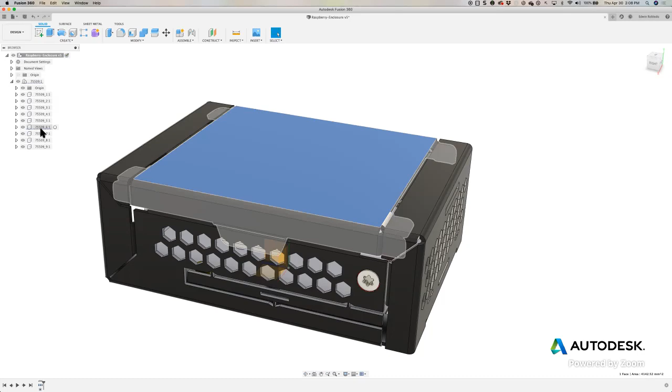So how would you do that? First, I'm going to hide a couple of faces here so I can get exposure to the bottom. If I click the faces, it highlights which one it is, so I can turn that one off. I'll turn this one off, and on the rear one we have over here, I'll turn this one off as well. I'm not deleting it, just turning it off, so I can get exposure to the center of it.

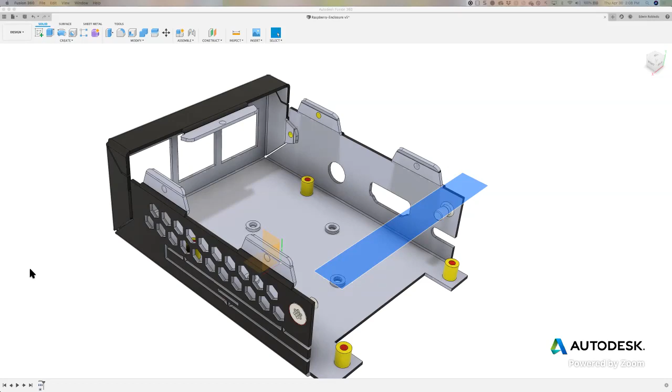Jorge, are you there? Yep, I'm here, Ed. Oh okay, I heard some breathing, I was like, what's going on here? Yeah, I thought it was the echo or something from YouTube. Hey, hi Jorge, nice to have you here, man, appreciate it. How are you? How's it going on your end? Doing pretty good, sorry I couldn't get in earlier, started getting a leak in the house over here. Oh, so you're seeing the effects of the storm that just came through, huh? Yes, yes I am. Wow, incredible.

So what I'm going to do is capture this enclosure here. I'm not going to draw it, I'm actually just going to capture it and bring this into Eagle, so I can lay out my circuit board based on this enclosure that I'm about to capture.

So the first thing I need to do is the circuit board is going to be sitting on these standoffs, sitting up on these standoffs right here. For it to be able to do it, since it's not working on one of the planes - these origins you see here are the natural planes of Fusion 360 - I don't want to do it on any of these planes. I actually want to have it on top of the standoff.

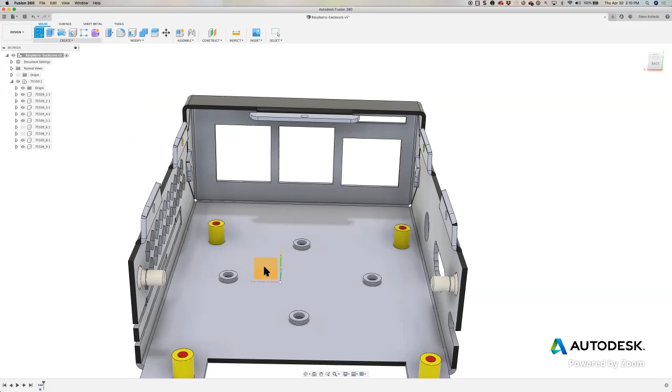So to start this process, we're going to click on the sketch and create a sketch. The first thing it asks when you create a sketch is which plane you want to use. You'll notice the default planes highlight, but I don't want to use any of those. I actually want to put it on this plane right here, right on top of the standoff - that's where I want to eventually put my sketch for my circuit board.

Now that I've highlighted what plane I want to use, on top of the standoff, I need to project the bottom of this enclosure, because this is more or less the same size that my circuit board needs to be. I'll make some small modifications to it as we go along.

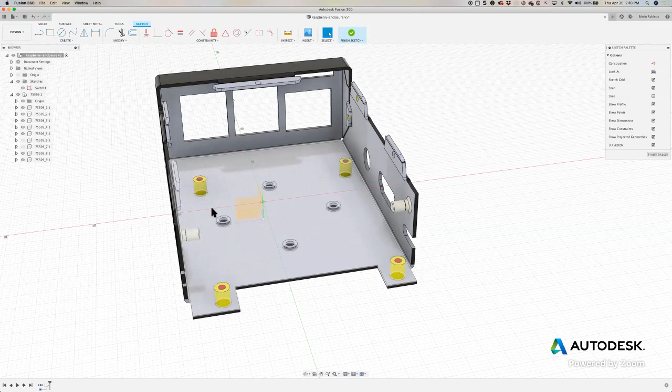Now, to capture this bottom of the enclosure, I'm going to use one of the features. I'm still in sketch mode, and as you can see, the menus change and I get the sketch palette with all these options. Under 'Create' it says 'Project', and I'm going to select the project option. Whatever I project will be projected onto that plane I already defined, on top of the standoff. So as I hover above the different profiles on this Pi enclosure, you can see it's not hitting the bottom.

It's actually on that plane, identified by those red lines. So I'm going to click on this enclosure right here on the bottom. I'll select that, and there's some information here that I do not need, that got projected. Let's take a look here.

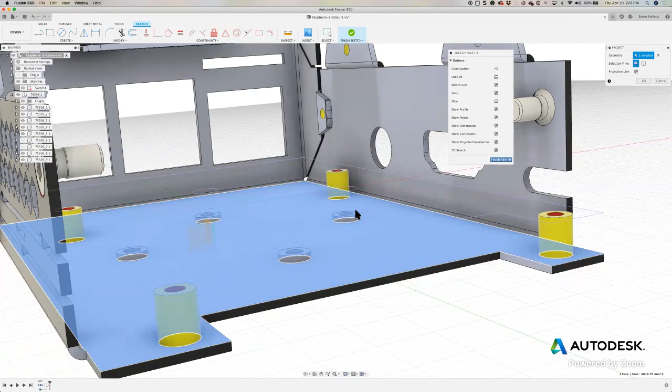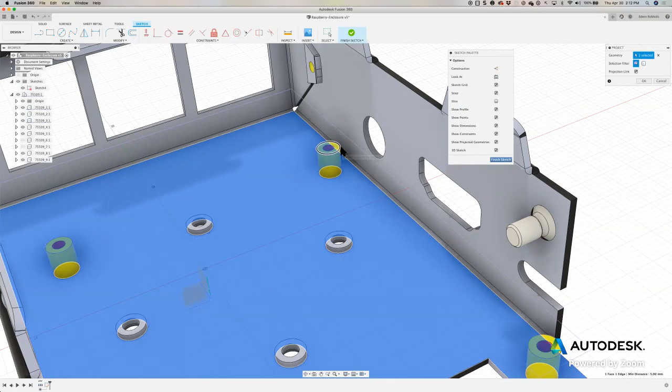Now for my standoffs, I only need the hole for the screw to be projected, not the outline. So I'm going to select those and delete them. I'll delete that one as well. I left click it and hit delete. I'll delete this one as well, get rid of that one. I'm just highlighting them and hitting delete.

As you can see, okay, so there we go. I think I missed that one, and they're gone now.

Now what I want to do is actually project the drill holes for each one, so I'm going to click on Create and project it again.

Remember, there's many ways of doing this. I'm just using the most elementary way because as an electrical engineer, my mechanical aspects are not very strong, so I'm trying to show you the most elemental approach. There are other ways of doing this which are probably more efficient, but this way actually works, and it works really well. I've been able to do it a couple times, and it works really well.

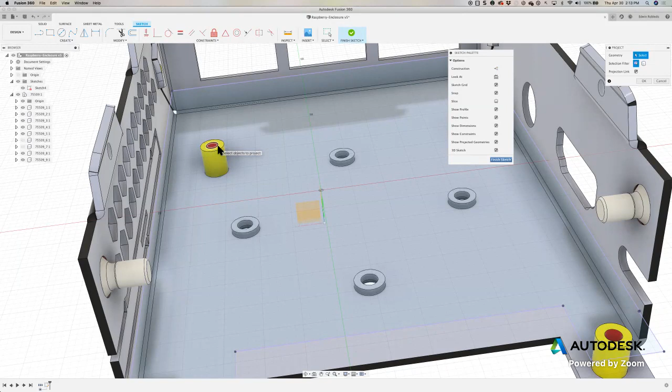So now what I'm doing is projecting those holes right there, as you can see, projecting only the holes now. Okay, so that gives me those holes that I want.

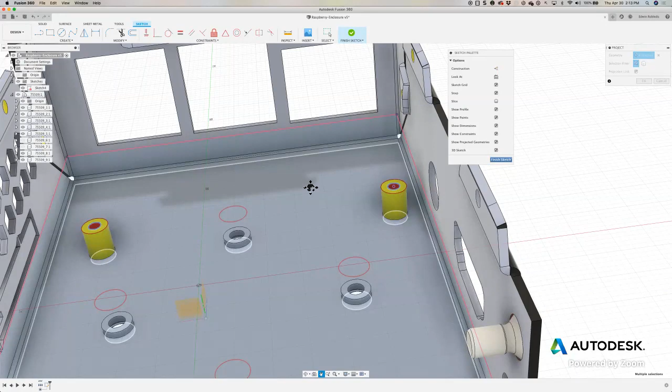Now, as you can see, the red line is going all the way. I'm going to click OK because I no longer need to continue to project. As soon as I highlighted project, this project option came up. I already projected everything I needed to project. I'll click OK, but I'm still in sketch mode.

Now the next thing I want to do is address that the circuit board is actually going to go all the way to the edge of the board. I don't need it to go all the way to the edge. I need to leave some space so that it actually fits into this enclosure outline.

So right here we have this option that says offset. I'll select offset, and I'll click on one of the sides that I already have. Let me zoom out a little bit so you can see the effect that it does. I'll click here, and now I get an offset.

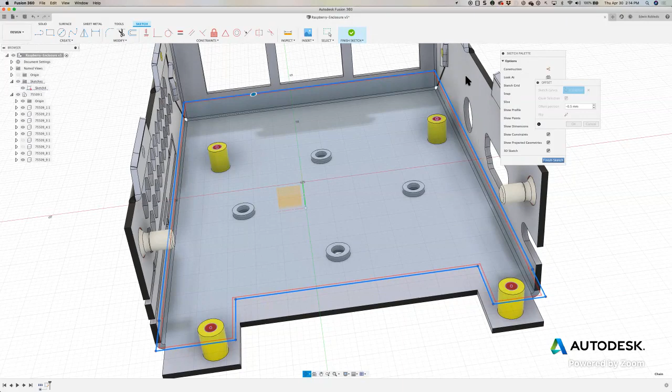In this case, when I did the offset, it went into the positive direction, so it expanded what I've drawn 1 millimeter all over the entire profile. I actually want to bring it in negative 0.5 millimeters because I just need it to be a bit smaller than the board outline. You see these red lines here, showing the profile that's going to be used if I give it a value of 0.5 millimeters. That's correct, and here's my offset menu, and you see the offset right there.

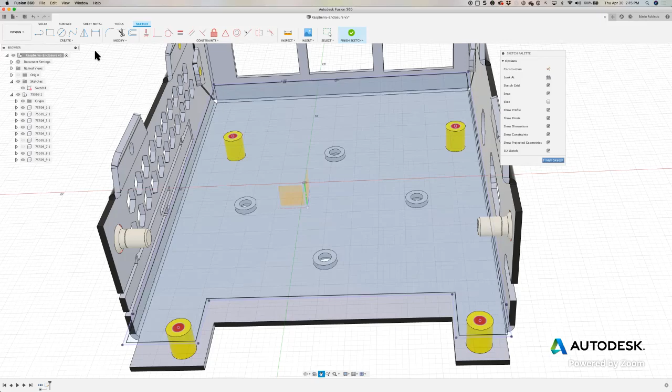The values are the same. I'll click OK because that's the value I want to use. Now that I've created the profile with the holes that I want, I'm going to select Finish Sketch. I'm done here. So now I've defined a profile.

By default, the sketch is not deleted, it's just hidden. So I'll go to the browser and enable the sketch option there, so I can actually see the profile for the sketch.

Now here are the steps that I had. I did this demo yesterday, and some people had trouble, I guess maybe I was going too fast. So let me make sure I go very detailed, that way you see exactly what's going to happen now, okay?

I'm going to click on Create, and select where it says Create 3D PCB. I'm going to select 3D PCB.

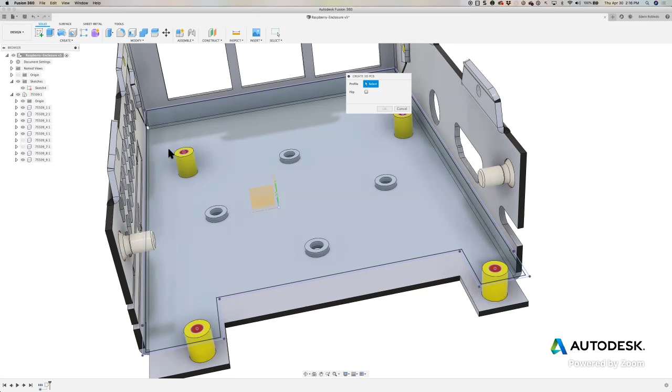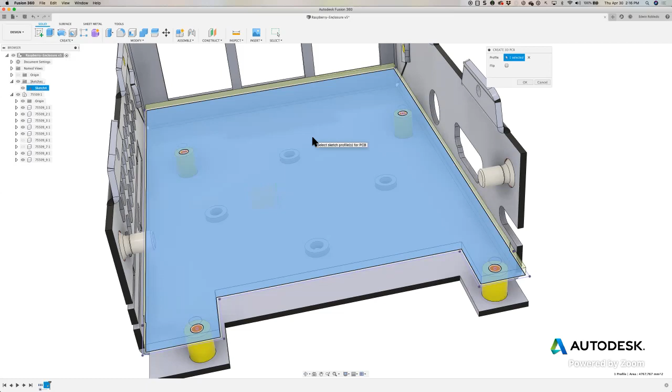Now I'll go ahead and select the profile I want. As you can see, I get the dialog box. I could flip it, and I could select more than one profile. This was a complex enclosure with some geometry that needed me to select and define different profiles. In this case, I only have one profile, which is this one, for sake of example. The profile that got generated was the one that we offset.

Let's see how that looks different. Let's zoom in here. As you can see, we have the original projection that we did, right here. And this is the offset projection, the one that we offset.

So we took this projection and we offset it, and I want to go with this one. That gives me a little bit of space, so when I insert the circuit board it doesn't put it too far away. So when I put in my micro USBs and all my connectors, my audio connectors, and my RJ45s, it's not that bad. It's close enough that when I solder them, they'll be soldered close enough that I could plug into it.

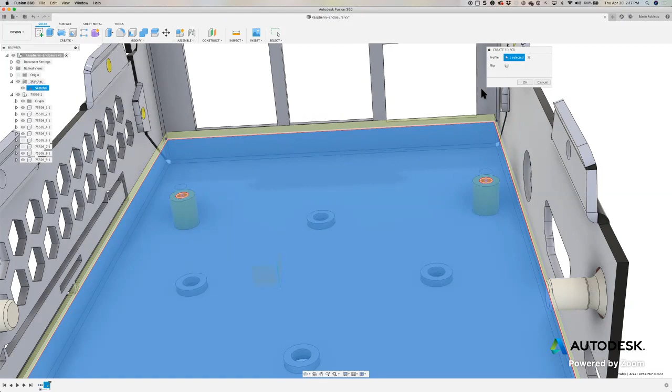And you'll see that the holes here get projected. I got my four holes from my standoffs. So I'm going to go ahead and click OK.

When I click OK, it's going to automatically open up a brand new tab and put me in the 3D PCB editor. That's what you're going to see. If you notice, I only have one tab open right now, the Raspberry Pi enclosure.

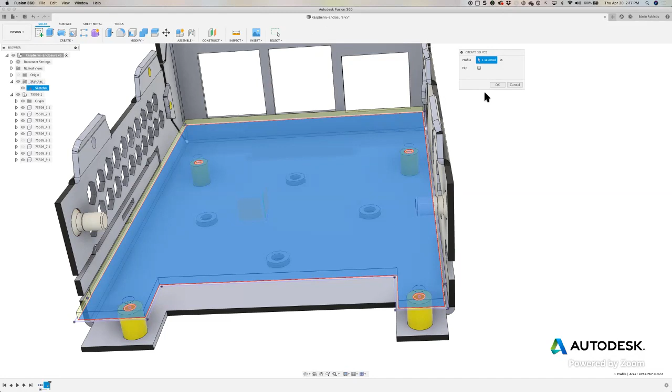Now as soon as I click OK, look what happens. It brought this into the 3D PCB editor. You'll notice it opened up a second tab. We had one tab, now we have a second tab with the 3D PCB editor only. In a few minutes you'll be noticing why it does this, and it's actually pretty neat. The 3D PCB editor is quite powerful. There's a lot of things we could do here, but not right now.

It looks like the outline of my board. As you can see, I was able to project all the holes and details from the projection. It's pretty neat that it even captured that little corner right there from the enclosure—it actually adopted those corners. This is something that could be done in Eagle directly, but if I don't have to do it in Eagle and I can get it straight from the enclosure, there's no more guesswork whether it's going to fit in here or not.

The first thing you can see is it has the name on the title and it's dirty, meaning it just has an asterisk, which means it needs to be saved. That's all that means, as you can see right here. So let's go ahead and save this so far. I'll click on save and call it Pi 3D PCB.

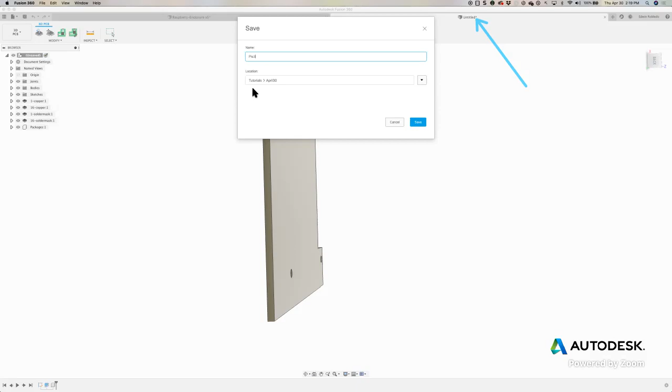Okay, very well. Now I want to capture this and bring it into Eagle. Let's see how we do that. So let's go back to Eagle.

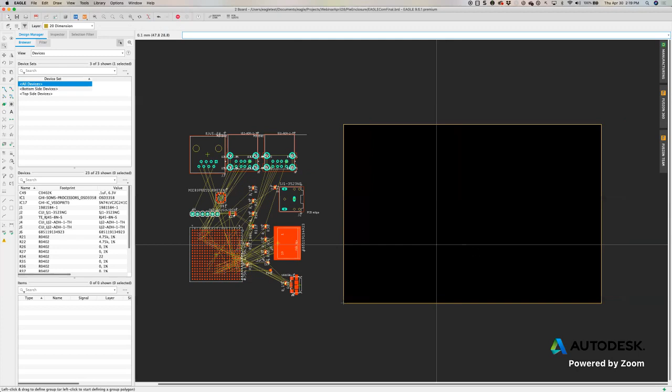Now that we're in Eagle, as you know, when you're working from your circuit board—this is the little circuit board I laid out for this example today—and you push over to board, you notice all the components show up on the left-hand side and you get this default board outline. Now what I want to do is take that outline I did in Fusion 360 and bring it in here. So I'll go ahead and click on Fusion 360 on the flyout menu that we have here.

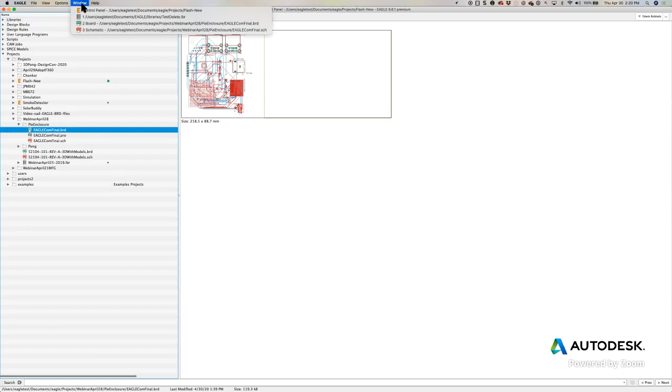Now this is going to take a look. First of all, the condition for this to work is that you need to be online. Let me go to the control panel so you could understand that—that's actually why I was at the control panel. You need to be online, so you're going to be seeing the symbol right there. If you're not online, this is not going to work because it needs to be able to access Fusion, and the only way it does that is through the internet. So let me go back to the board and click on the flyout menu that says Fusion 360.

I have the option to either create a brand new Fusion 360 design, which pushes my circuit board straight to Fusion 360, or link to an existing design. In that first scenario, the board layout drives the enclosure since I'm not taking an existing enclosure into consideration. I'm just pushing the circuit board to Fusion 360, and the mechanical engineer will create an enclosure surrounding it.

But I'll use the most common example, which is capturing from an existing enclosure. So I'll click on link to an existing Fusion 360 design.

Now it's going to take a look at all the different hubs that I'm a member of. I'm going to use the one I've been using, my personal hub, Edwin Robledo. That's the hub I've been doing this example with, and this data set is there. It's loading here as it browses all the projects I have open.

So I need to go to my project folder, Tutorial, as you can see here. Underneath Tutorial, I have a subfolder called April 30th, and there's my 3D file.

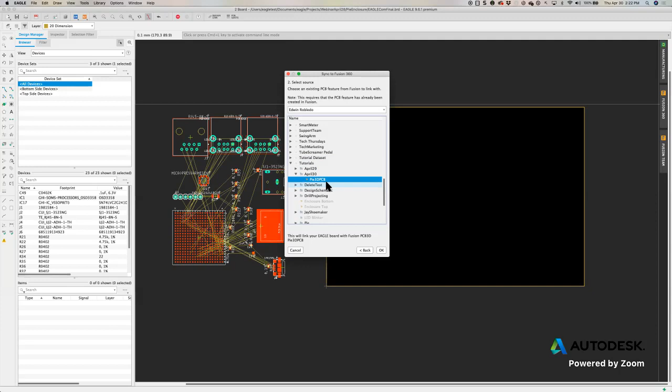This is the name I gave the project, Pi 3D PCB, and you'll see that it matches in Eagle as Pi 3D PCB. Now let's go ahead and click OK. This should take maybe a minute, hopefully less.

Now I have the option to push to Fusion or pull from Fusion. When in doubt, always pull from Fusion—I learned that from Jorge. So when in doubt, always pull from Fusion. Is that right? I think I got that right, Jorge?

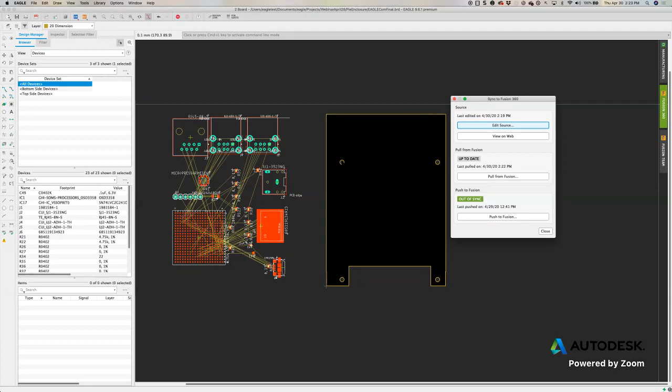As you can see, my outline automatically came in. I did not have to do any file conversions at all—it just came in automatically. So I'm going to click on close. I'm not going to push back to Fusion because I want to move all my parts into here. Now I have to take into consideration these holes, which are the mounting holes. Let me go ahead and click on close.

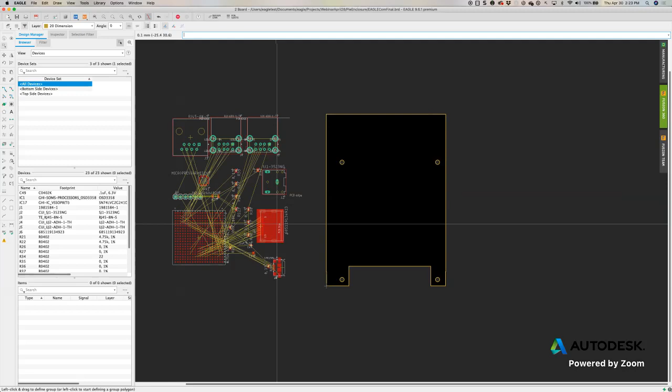I'm going to capture this by defining a group. In Eagle, the group command is always on by default. I could either select single components by clicking and holding at the origin of the component—let me find the origin of this part here—or I could just click on any blank area and click and drag to select all the assets I want.

So now I'll just click and hold on one of the origins of one of the components and drag it into here. I wanted to show you this because I don't have to do any clicks or select any icons—it's just already there, so I'll take a guess here and just put it here.

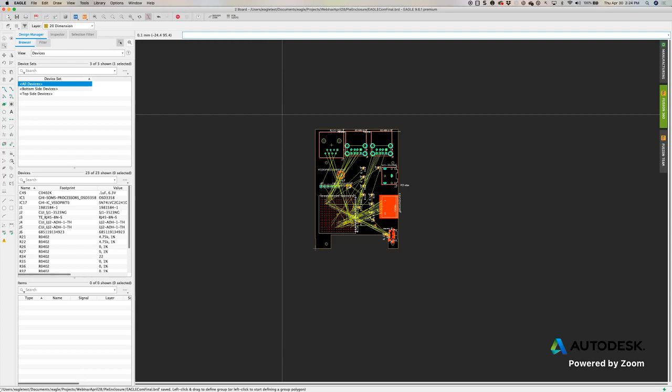Okay, I'll save what I've accomplished so far. I'll click OK. And it's always good practice that before you actually start any routing, it's a really good idea to go ahead and push it to Fusion 360, to make sure that this is going to fit, that we're okay.

Notice that my origin is actually the bottom left corner here, that's my 0,0. The reason why we usually try to capture this as my origin in Fusion is that way when I generate my fabrication files, everything will be in a positive coordinate. So when you submit your Gerber files and your drill files, it's undesirable to have negative values.

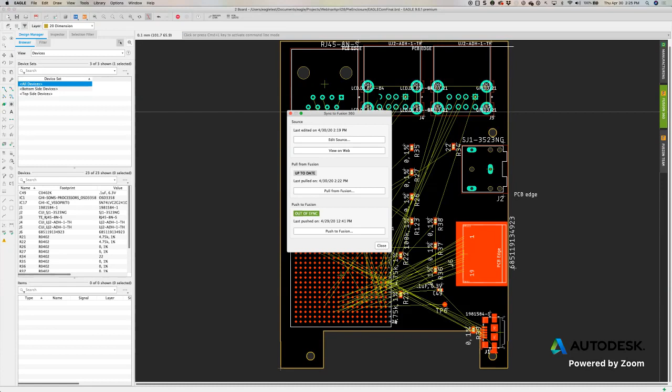Now that I've accomplished this, let's go ahead and save what we've done so far, and push it over to Fusion 360 to see what happens. So I'll click here to push to Fusion 360. Remember, my source is still the 3D PCB that I had. If I wanted to push it to somewhere else I could click cancel link, but I actually want to continue working with that other one I had, so I'm going to go ahead and push to Fusion 360.

The little green check marks you see next to the name of each component just let me know that those actually have 3D models mapped. The ones that do not have a check mark just mean there is no 3D model mapped. So let's go ahead and click on push.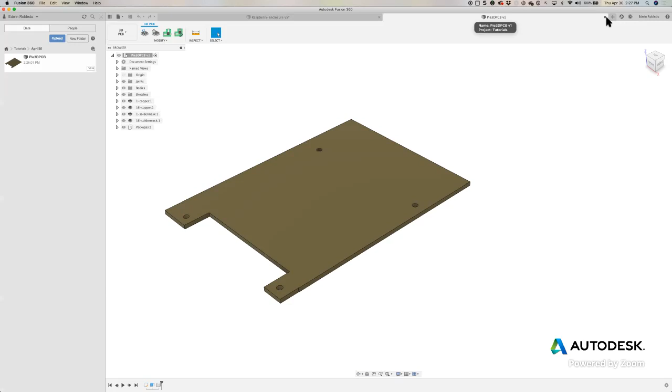So the first thing you need to do is click on refresh, and you actually need to close this tab, and then I'll double click that project.

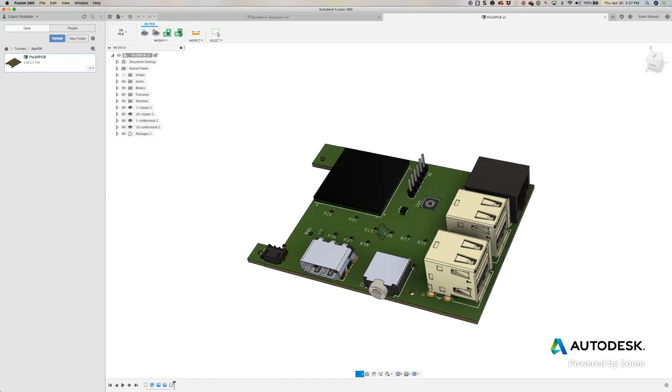Now, when it loads again, you'll notice that it loads a 3D PCB with all of the components populated on the circuit board, as you can see here. So here's everything that we need.

I almost have everything populated here. Not sure why this component did not come up, but pretty sure we had that there.

As you can see on the 3D PCB, if I wanted to move something here, I could actually move this part. I noticed that this resistor is kind of hanging in the air here, so let me just go ahead and move that. I'll click here where it says move, modify, over in this tab here, it says modify. I could actually select a component.

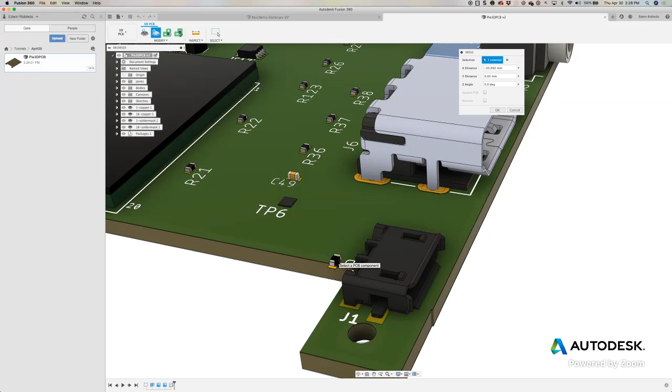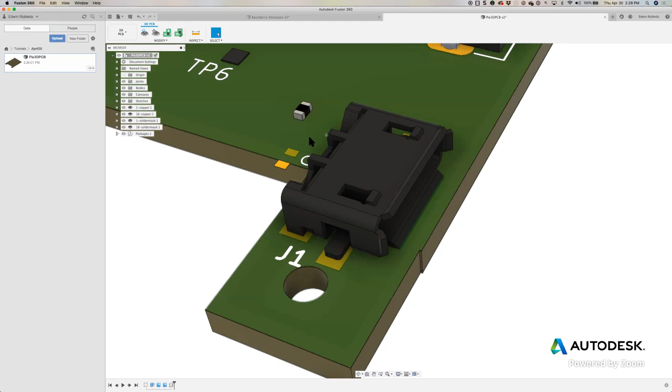Click cancel, let's try this one more time. There we go, now it lets me select the part. Put this guy over here and click OK.

Now that I've moved that component because it was actually outside of the board, I'm going to go ahead and save what I've done. It's a really good time, every time you save, to put some information here. So you're going to put in 'moved R6 into board.' I'll go ahead and click OK, save.

Now let's go ahead and return to Fusion 360, I'm sorry, to Eagle, and let's see what's going on in Eagle over here. So in Eagle, after a while, after several minutes of working here, you'll see this actually turn kind of a red color. But for sake of time, I'm just going to go ahead and kind of force it.

So I'll click on Fusion 360, and when it refreshes it lets me know, look, I'm out of sync. Usually once it catches up you'll see it like this. Once you're working with Eagle, if the mechanical engineer in the 3D PCB made a modification, eventually you'll see it come up in red like this. You have to make sure you're online.

So I'll click here, there's a modification, and the modification was this right here, this component, this resistor right here. I guess it was R39, but the 39 was hanging, so I saw 6. So let me click on pull from Fusion, remember I did that, and then I'll click here on pull.

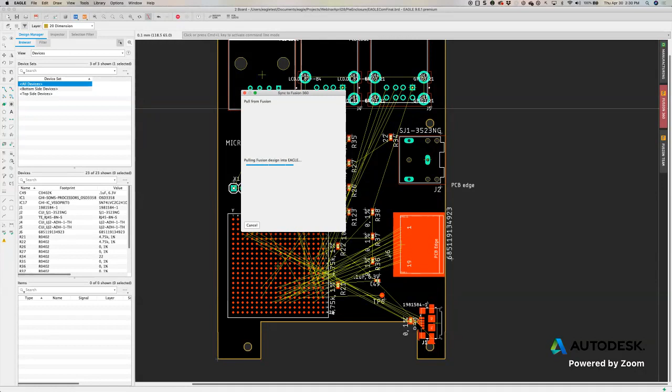Click on close, and you'll notice that R39 has actually moved and adopted the movement we did over in Fusion. So let's recap what we've accomplished so far.

When adding components to your schematic, if you're going to need an electromechanical workflow, it's preferred to use managed libraries that already have 3D models assigned to them. Eagle comes with a large repository, something like 350 libraries or more, and more are constantly being added.

Not all of them have 3D models, so we're trying our best to catch up with that. So when doing the add command, you should do it in the schematic editor, not on the board layout, unless it's something non-electrical.

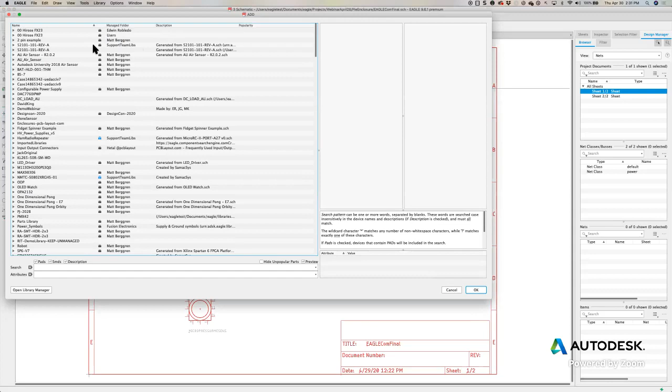You'll be able to expand some of these libraries. Let me go ahead and select. You see the managed folders. The ones that have managed folders called Eagle PCB are created by our team, and we have a system by which we can share managed libraries through managed folders. That's where this one is, because I was actually working with a team.

Let's go ahead and select any of these libraries. I'll go down to the RCL library. You'll notice the ones that have these symbols here means they have a 3D model assigned to them. Those are pretty neat to use, and we have a really nice repository of those that already have 3D models.

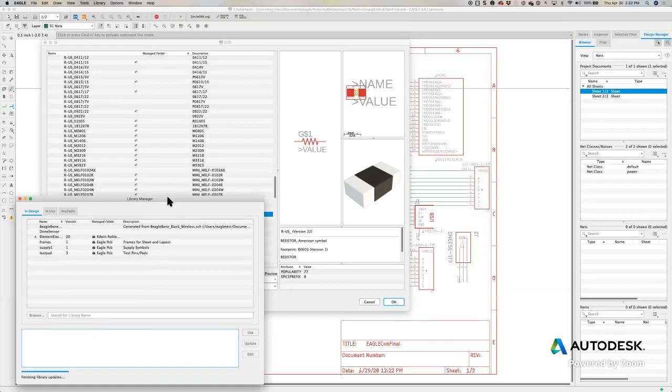Now you could go to the Open Library Manager. The first thing it lets you know is all the libraries you use in your current design, which currently have in use. Every time you do the add command on your schematic or circuit board, these are the libraries that will show up.

In Available are additional resources, additional libraries we have available. When it has this little symbol next to them, it's letting you know you haven't downloaded this library yet—it's available for download. The ones without that symbol are local, meaning you have them cached right now; they're not in use, but cached.

Let's go ahead and take a look at some of these libraries. This is from a managed folder that we use—I think Jorge made this team one, or somebody did. We're members of that one, and these are libraries shared through that managed folder.

Let me go ahead and view some more. These are some of my own personal managed libraries—remember, a managed library is how I can assign 3D models to it. This one is by our team of librarians as well, for Fusion 360. These are contributed by PCB Layout, which also does a really good job assigning 3D models to their components.

We have Seeed Studio, SparkFun, Adafruit, and a very long list of available components by Würth Electronics as well. The majority of the Würth libraries, I'd dare say all of them, include 3D models too, and we're getting more distributors and manufacturers to add to this repository.

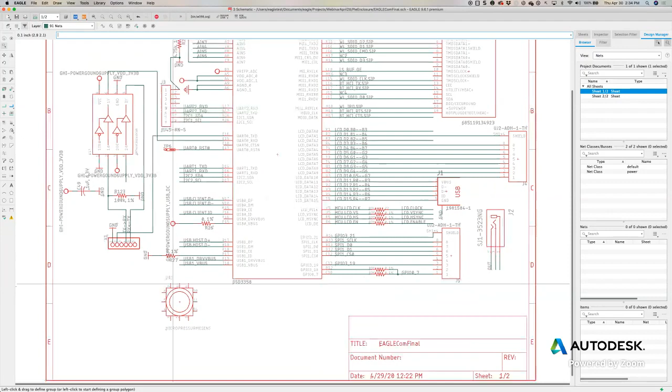Let me select one of these examples—I'll pick something small since we don't want to spend too much time. You go directly to the component, to the origin of the part, and right-click the component. There's going to be an option that says 'add custom 3D package.'

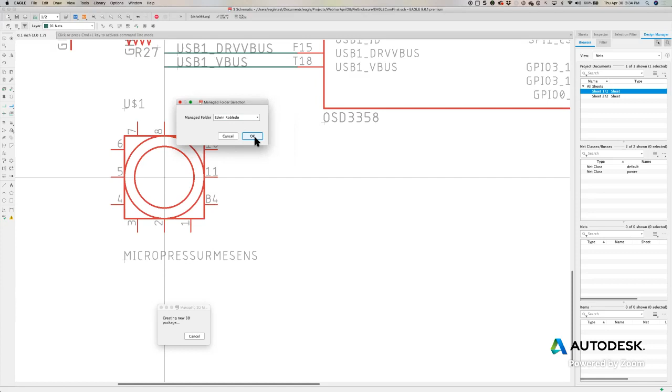Let me see if it's asking which managed folder I wish to work with this component from. I just want to work from my own personal folder, which is my name, and I'll go ahead and click OK.

Now this is online. We're currently online right now. This package editor is what we call the package editor.

Now I have three options here to assign this a 3D model. It's a shame I don't have a step file for this right now available, but there are three options you could use to assign this a 3D model.

First of all, if you have a step file for this footprint, you could just click on upload. If you've downloaded the step file for it, click upload and look for that step file. I actually have a repository of step files somewhere.

That I keep here. Scripts, step files by name. I keep a nice repository of step files that I continuously download from my components.

So that's one way I could map it. This is mapping it directly from the schematic.

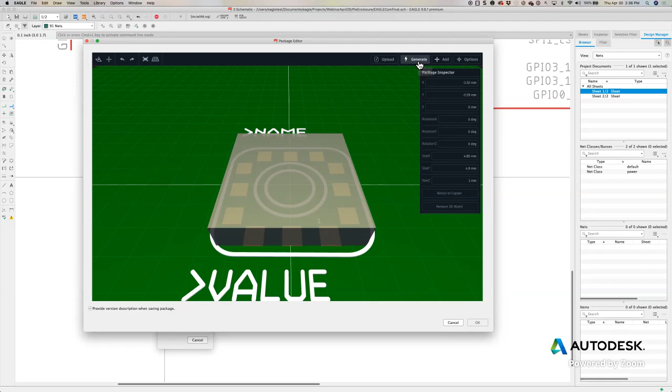Or if this was an IPC compliant type style component, I could use the IPC compliant package generator, which has many templates available. If it conforms, I could select one of these templates, put in the measurements for that component, and click on update preview.

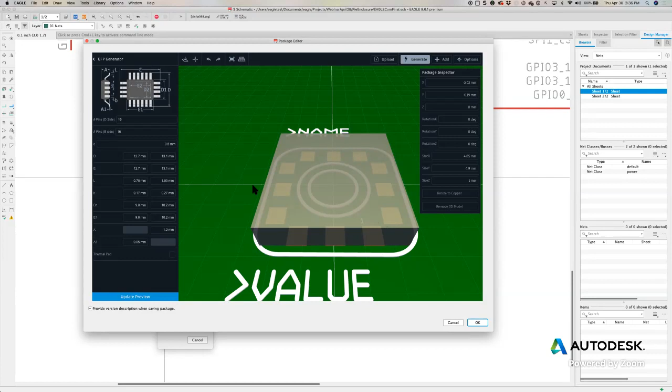That way I could see if it fits. If not, I could select another template and continue until I get the right 3D model assigned to this.

Or you could also click on the add option we have here as well. Let me get rid of that one. This will let you browse, and as I've continued to work with many projects...

It captures any 3D models I've been using in the past, any step files I've been using, any package generated using the generator, and it builds a repository of assets, 3D models I constantly use, as you can see here.

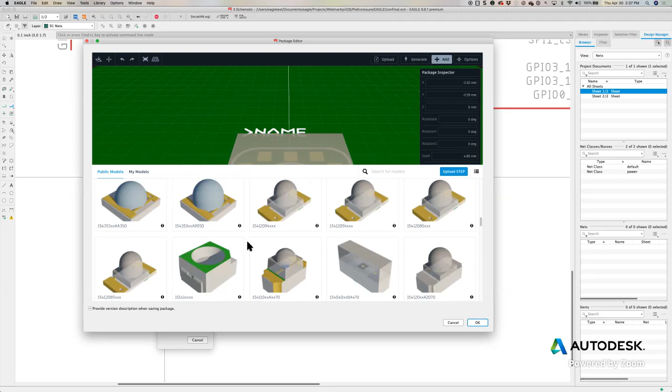Now we publicly have many of them available to you as well. These are where it says public models, so these are contributions by our librarians. They've been adding many 3D models for you as well.

So you could actually select one of these that could map out with that component. And it has a search option that you see here. So let's say we were to select Pixie, this was a Pixie or something like that. And it didn't find any for those.

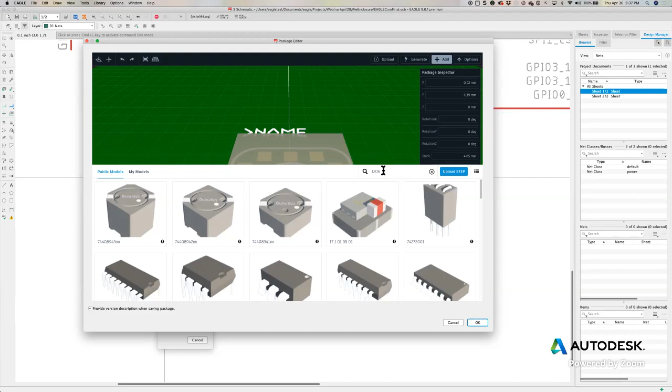So let's type... okay, so there you got some tools, resistors, capacitors, and LEDs, and so forth. Okay, so that's one way you would be able to map them.

If you haven't done it in the library, you could do it directly on the schematic. Now let's go ahead and return to the circuit board.

I'm just going to use the auto router really quick here. I see I have kind of a violation going on here on this component right here. So let me just go ahead and move this over. Let's move this over. That way I don't have... oops, it's moving the whole board.

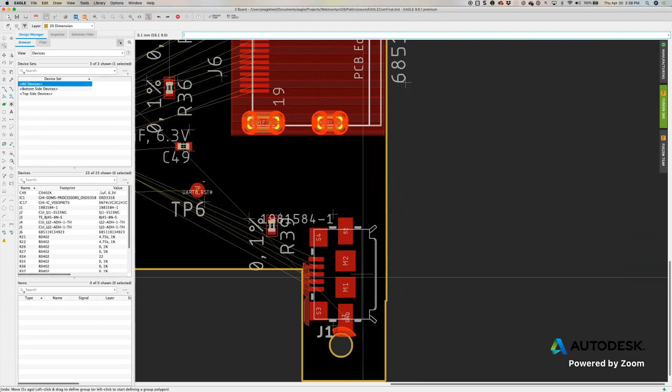Let me do file undo. Undo. Okay, I'm just going to hit escape because apparently I had a group defined and I was remembering it. So I just moved this part over here a little bit, right? I'm not in violation right there.

Let me save what I've done so far, and I'm just going to run the auto router really quick. This is the auto router.

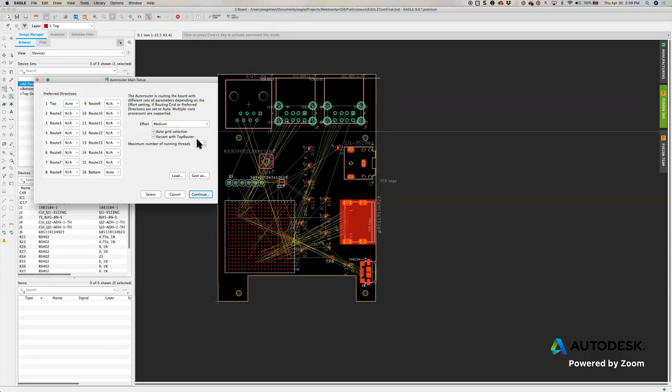I'm just going to select medium effort. I'm going to allow it to keep the variant topological router as well as it could select its own grid. Click on continue. It's going to do a total of 10 runs, and we'll pick from one of those.

As you know, they all run simultaneously on multiple cores. If you have a computer with multiple cores, it runs in parallel.

I see a question here from Jorge, regarding creating documentation using the application. Absolutely, you can. Yeah, you can. That's no problem.

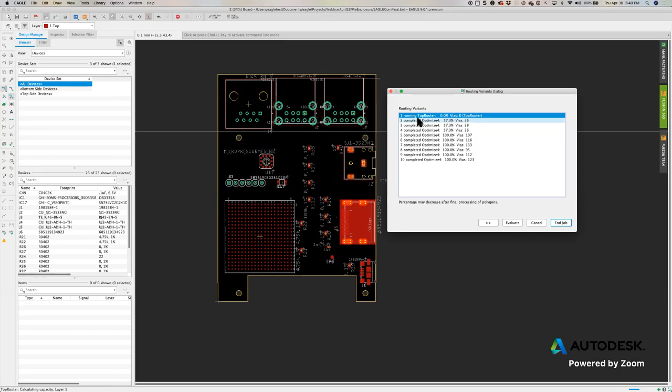Now we could take a look at the progress of the auto router. Let's go along and see what the progress is, and select one. The topological router is still thinking about it, so let's give it another minute. If not, we'll just go ahead and select one of these that have 100%. I usually base my decision on the one that's 100% with the least amount of vias.

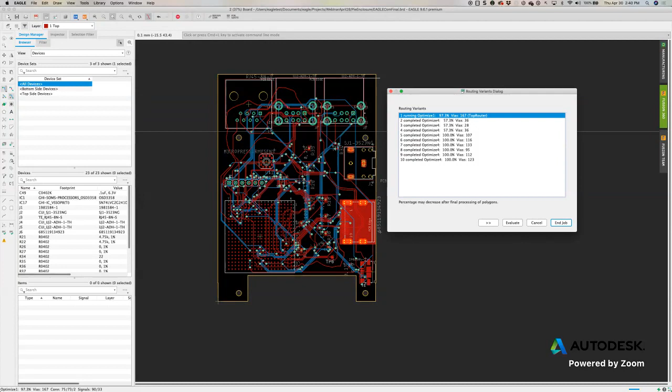That's actually why the topological router a lot of times takes a little longer. It will commonly be the one that has the least amount of traces, and it does a really good job. I really like the patterns that it does. So if you're just a little bit patient, depending on how dense the board is, it does a really good job at routing. That's a pretty good one.

It's at 97%, so I'll just let it finish. Just give it one more minute. So Abe, I think I answered your question already. Okay, you're good.

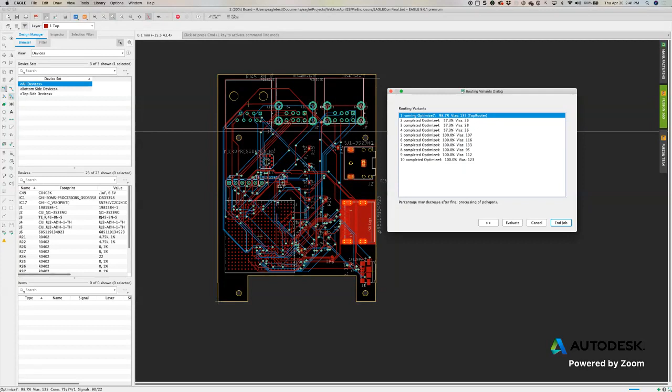So Christopher, you have a question about how to create a PCB design. You're more than welcome, I'll be honest with you, on the YouTube channel for Autodesk Eagle or Fusion 360, on the electronic side of the Fusion 360 YouTube channel, we've covered many projects of how to put together a circuit board. But if you want to contact us, I always put our email there.

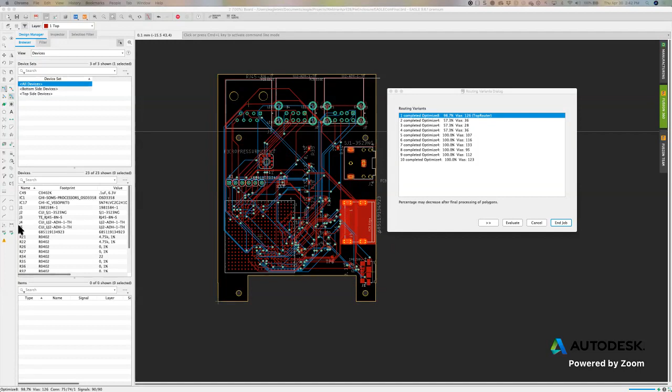So I'm going to go ahead and select this completed route that we have here. Click on End Job because I'm happy with these results. I'll click on Save, and you see it's in green, just letting me know that I need to push back to Fusion 360 so it could catch up. So let's go ahead and push this back to Fusion 360. We'll click on Push.

Hey Fox, you're never too late, Fox. You know, one of these days I want you to host this meeting for us, because I like to see it from your perspective. You're one of our experts, so glad you made it. Okay.

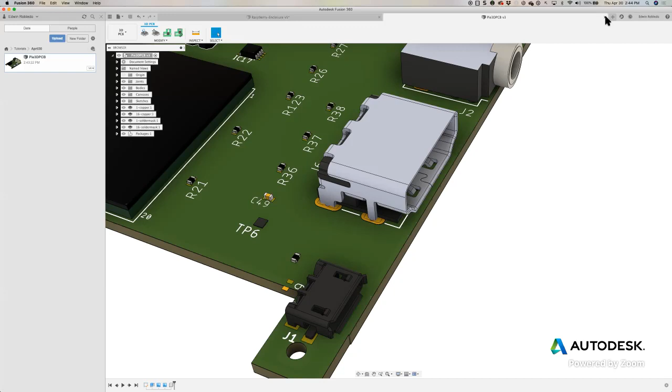Now it might take a little bit longer, just because of the fact that I've added so much information to it. So let's go over to Fusion 360. What's our experience here? As you could see, I need to do a refresh. Now I'll go ahead and close my project. We're hoping to improve on this interface really soon, so you don't have to be opening and closing. It would be really nice if it automatically showed up.

Okay, and as you could see, my routes came over. Any modifications that I have done to the circuit board would have come over as well. Okay, so we have everything that we wanted here.

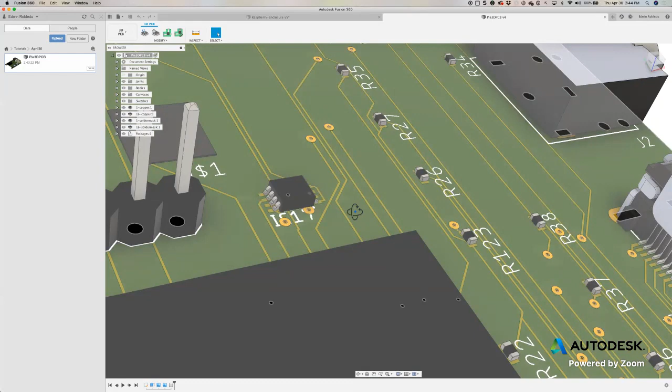Well now, so you have your vias. The thing I really want to point out here is that every aspect of the circuit board is a separate asset. In other words, every via is an independent component, an asset here. So the via consists of these copper rings with a plated copper ring in the middle. These are all independent extruded components. The traces are extruded components.

And what's important about this is that let's say you needed to do a tool path. If you were to CNC this, you actually can, because all of the information here is selectable. In other words, when we were doing this with Fusion 360 and Eagle before, all this information when it came to the traces was being brought in as a picture, an image. But now each one is an individual asset.

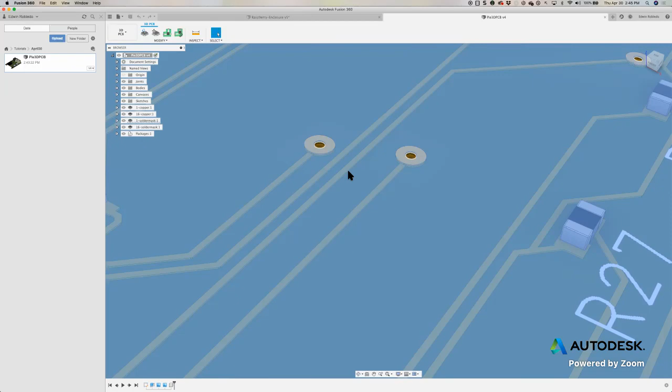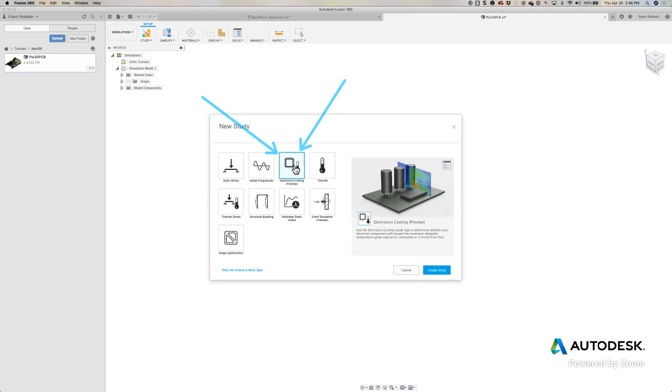Because of the way the developing team designed this, I can switch to the simulation workspace and assign watts to my components to run the e-cooling properties we now have in Fusion 360. I don't want to run it now because it takes a long time to solve, but I could assign watts for thermal heat capabilities and run a thermal simulation. I advise you to try this out—there's an update video made by this team that added this to Fusion 360 not too long ago.

Now the last thing I want to do is make some modifications to this board outline. As a mechanical engineer, it's actually a lot easier to make changes to the board outline in Fusion 360 compared to Eagle. This might not be relevant for simple boards, but if you're working on a complex board outline, you may want to make modifications in Fusion rather than in Eagle. Let's see how that would be done.

As you notice, there's a timeline here on the bottom left. This timeline shows the sketch, extrusions, and other steps used to complete the entire circuit board. So I'm going to right click on the outline of the board—it says outline Pi 3D PCB—and select edit sketch. It puts it flat there, and now I have all the sketch design tools available.

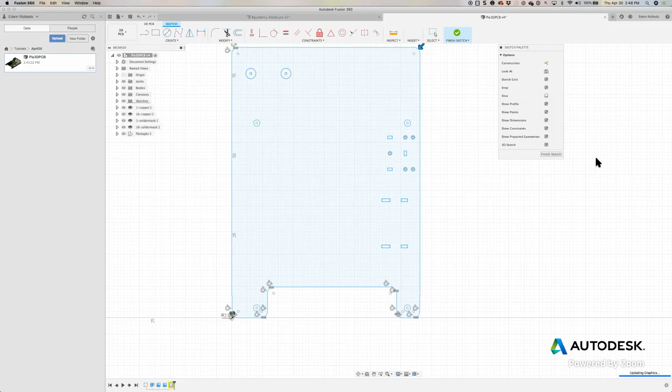For my example, I'm just going to do some minor fillets here—round off that corner, and continue rounding some more corners. You can see those are some minor changes. Since we're at it, we'll do them up here as well. Now we'll click on Finish Sketch. It builds everything all over again, rebuilding the browser, and now my board has the new board outline.

Now we have to go ahead and save what we've done so far. I'll click save and add a comment: Modified Board Outline Fillets, then click OK. Now that I've done this, let's go back—I got a little asterisk and a check mark, letting me know it's completed.

Let's go back to Eagle and see what happens. Clicking close, it lets me know I'm out of sync with Fusion, so I need to pull from Fusion. Now you'll see these modifications happening at each one of our corners. The reason I like giving a name every time I save is I put a comment—as you can see, it's the same comment I did in Fusion: Modified board outline with the fillet corners. That's the comment I put, and I'll click on Pull.

So if you needed to make any updates to the board outline, it could be done in Eagle and Fusion will catch up, or it could be done in Fusion, which I think is better since you have all those tools—splines and everything necessary for any type of complex outline. Okay, so it caught up. Now let's push back to Fusion really quick so we have full synchronization between Fusion and Eagle.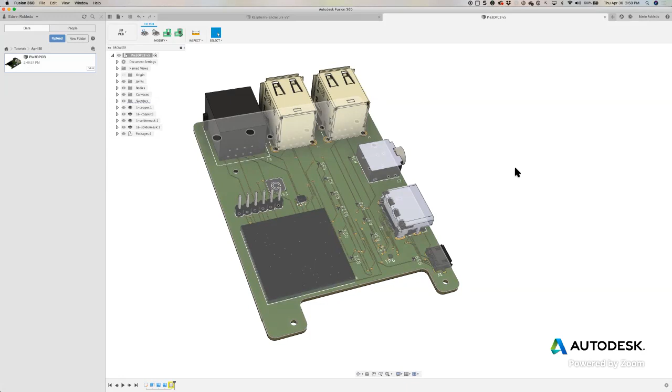Okay, so let's go over the Fusion. Fusion will let us know also when it's done. When we actually see the refresh here, it'll let us know when it's finished.

While it opens, as you saw, my corners got rounded off as I did already in the 3D PCB. You got fillet. Okay, so now we're fully synchronized.

Now what we want to do is put this circuit board inside of this outline, right? We want to put it in here. So let's go ahead and do that. I'm going to right click here and select Insert into Current Design.

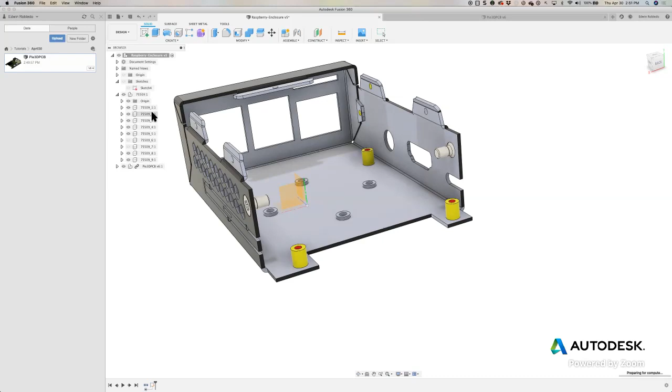Now, the orientation of the circuit board is going to be kind of off from the enclosure because the origins that Eagle uses versus the origins that Fusion 360 uses are totally off. That's something we're wanting to improve on. As I said earlier, we usually put the circuit boards all that way you have positive coordinates. In Fusion 360, you don't necessarily do that because of symmetry. You may want to start working from the center and go out. It doesn't really matter if you have negative coordinates at all.

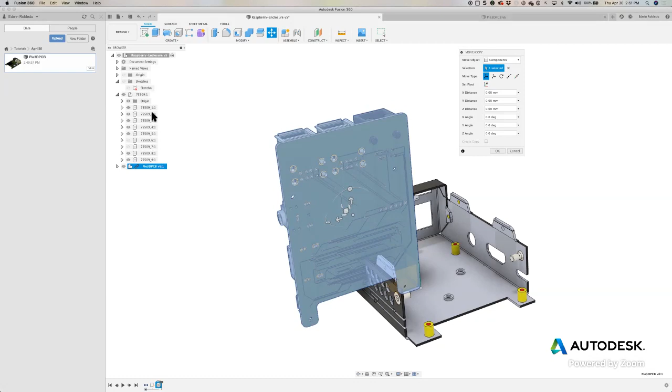Now, so let's go ahead and start moving this around a little bit. Let's line it up, move that 90 degrees. And let's move this way, over here this way. Move that 180 degrees. Put 180 degrees there. That way it's perfect.

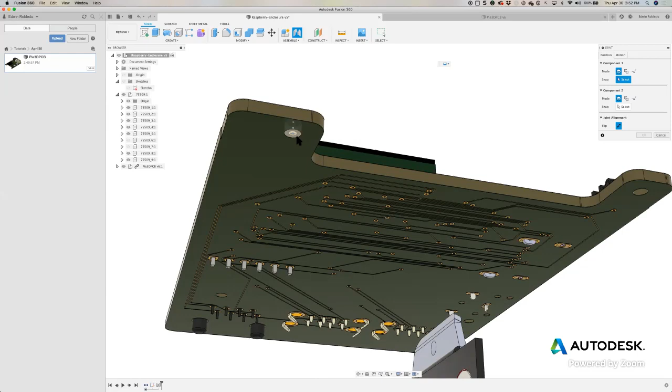Now that I have it in the right orientation, I'm just going to use the joint option under assemble, the joint. I'm going to tell it I want to go from this hole that's right there. I just want to line it up, I want that board to line up on this surface, on this hole, on this standoff that we have right here. Okay, if everything goes right, it lines it up for me. I'll go ahead and click OK.

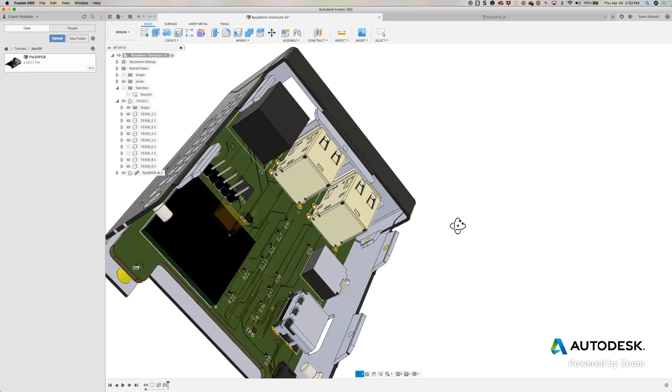And now I've actually put the board inside the enclosure. Let me just get my browser box up. Now, you'll notice that when it actually brought it in, it brings it in as a link, as you could see here. It's actually a link. Let me see, the circuit board that I just brought in is linked.

Here's the 3D PCB, the Pi 3D PCB. It's linked, so as of right now, I cannot really make any modifications here. Now, if I go back to the 3D PCB, or in Eagle, let's say I just move something. So let's go ahead and move this right here. We'll just go ahead and move this part right here, make a movement. Okay, we'll click OK, and we'll save it.

And then I just want to cycle through Eagle again. See, it automatically says that I need a pull.

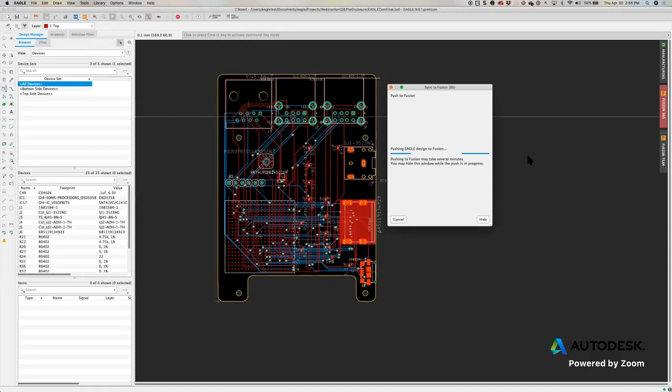I could have moved these connectors a little closer to the edge of the board, but today what we really wanted to demonstrate was the electromechanical capabilities. And there's just one more that I want to end this with. That way you could see that if I make the updates in the 3D PCB, I can make it in the Eagle itself or in the 3D PCB. Wherever I have inserted that circuit board in any enclosures, if it's one or more enclosures, that link will actually let me know that there's some updates. That way I could get the latest revisions and add it to my total design.

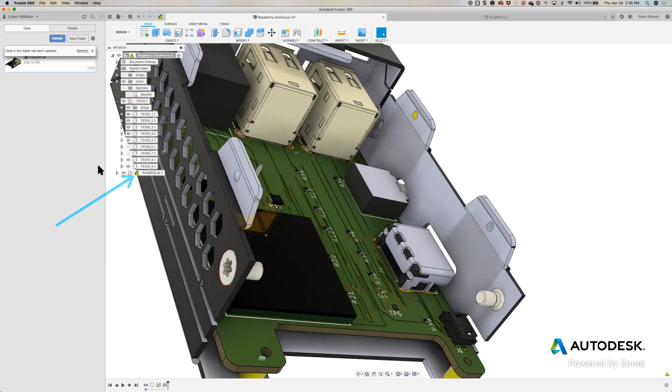So okay, so let's go here. You'll notice that when I save my 3D PCB, I get 2 notifications here. So that one there, and this one over here. If I hover over them, it's just letting me know, look, need to click here, that way I could get the latest updates that are on the 3D PCB for that link specifically. I'll just go ahead and click OK there. And you'll notice that our IC17 is actually going to move as soon as it completes the synchronization.

As you could see, it moved. And since we synchronized between the 3D PCB and Eagle, it actually moved all the landings as well. The same changes I did in the 3D PCB I synchronized between Eagle and Fusion 360. You'll see that everything now comes together and it's actually all lined up.

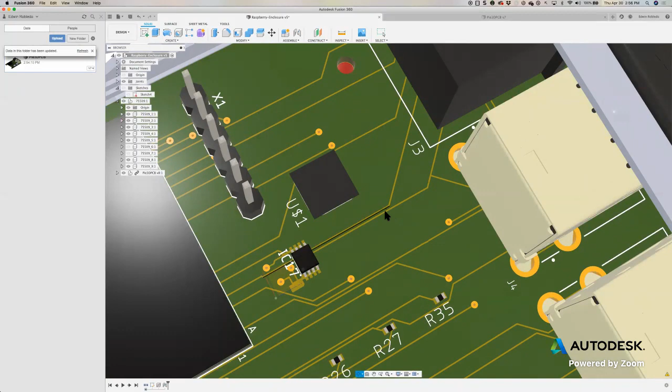My holes are lined up, my screw holes are lined up, everything lines up exactly where I want it. So I could continue lining up here. Now, the nice tool that you'll be using here that I always like to recommend is Inspect. Inspect actually lets you make measurements on this. Let's say, for example, this isn't actually lining up from this wall to this wall. With a measurement, you could actually get the delta here.

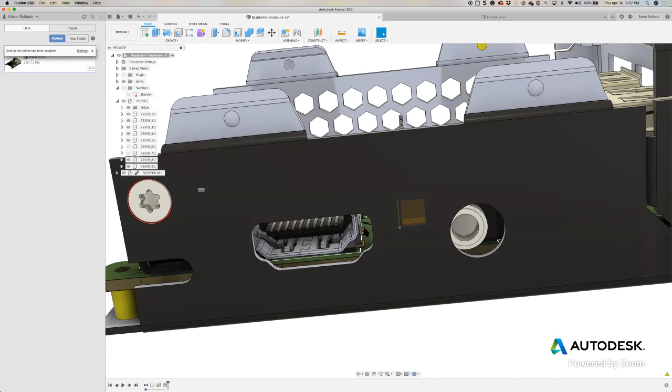That way you could go over here and make that modification, then you could actually move that delta on that component. So always make sure that you understand that there's Inspect, we have Inspect here as well. If you need to make measurements over here, you could accomplish that easily right here. You'll get measurements here, so that way you can align whatever needs aligned between the circuit board version, the circuit board that's inside the enclosure, and the 3D PCB.

That concludes today's demonstration. I wanted to do it a little shorter, but I really wanted to go into as much detail as possible. My internet has been working really well today, so I really wanted to go into as much detail as I could. I appreciate everybody joining us today. Hopefully the information that you wanted covered, I was able to cover.

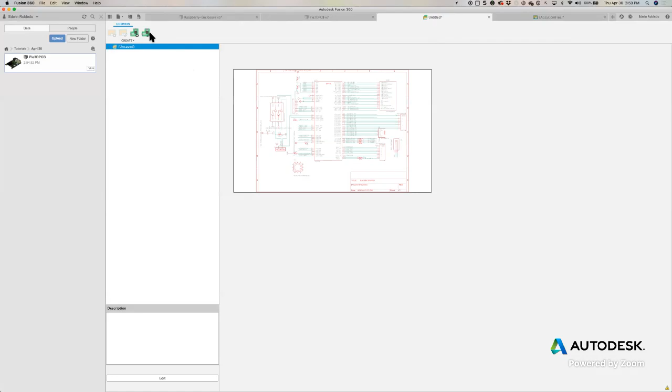And in the electronic document is where you actually control what circuit board is linked to which schematic. Okay, so I'll just go back and select the board file. And as you could see, we have a circuit board editor, a fully capable circuit board editor within Fusion 360. I could actually from here go ahead and create the 3D PCB directly from here as well. So if you wanted to work directly from Fusion 360 and create your circuit boards, it's possible to do it right here. But the link between Eagle and Fusion 360 is valid and it works really well as well.

Okay, I just wanted to bring this up really quick, that way you could see if you already have a Fusion 360 license, how you could take advantage of it to take care of your electronic designs as well. Jorge, is there anything that needs to be addressed, you think?

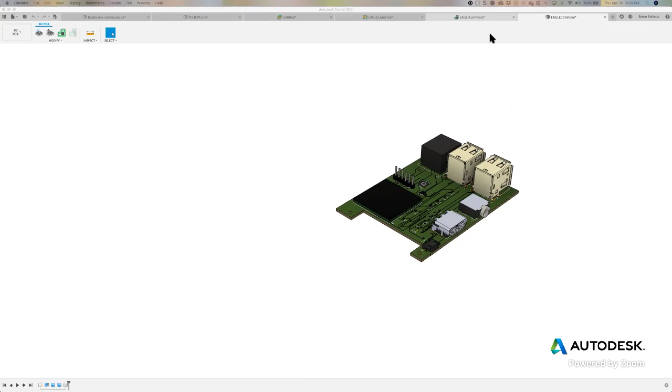Yeah, Edwin. So hopefully with this demo, you could see that you can use your Eagle design files in Fusion, but also in Fusion, if you have a design file, or you've been supplied a design file, or you have one in Fusion, you could always export that as well. And it'll give you the option of what version of Eagle you actually want to use. Most probably you'll be using the one that says Eagle 9.x, that way it keeps a lot of the properties. Or you could select Eagle board file as well if it's an earlier version than version 9. And you could do this for the schematic as well as the board.